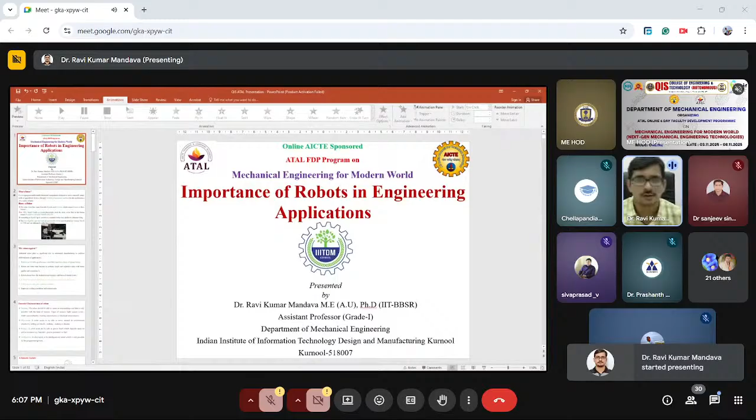Thank you, Samir sir. I think my presentation is visible to you. Yes, sir. Yes, you are audible and visible, sir.

Okay, thank you. Very good evening and warm welcome to you all participants. Myself, Dr. Ravi Kumar Mandava, Assistant Professor at IIIT Kurnool. I have done my PhD in robotics. Today, I am going to talk about the importance of robots in engineering applications.

I think you all know that nowadays many places people are using robots. It is not only for industrial applications, but they are also being used in home applications, personal applications, medical applications, agriculture applications. There are numerous applications where they are being used, and very soon we can see the complete human tasks being done by humanoid robots as well.

Today my talk will first discuss the introduction part about the robot. Then I want to show a few examples of the different types of applications where robots are used, like in industrial, agriculture, or medical applications. Before going into my talk, first I want to discuss what is a robot.

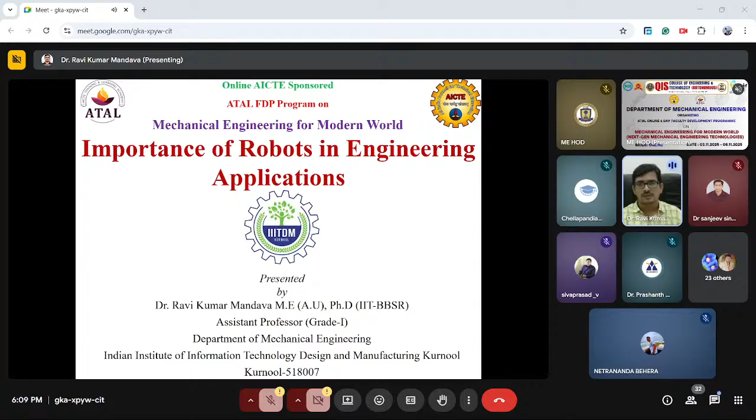I think maybe a few people may know, many may have heard about the exact meaning of the robot. Generally, when we call something a robot, it is reprogrammable. When we are going to design, purchase, or develop a robot, it should be a reprogrammable and multifunctional manipulator. When we design or develop a robot, if it can do only one particular task, sometimes we may not require that particular task anymore - we want to change to another task, meaning we want to do some other application.

When we discuss this, generally the manufacturing cost when we purchase or develop a robot should be high. That's why whenever we purchase or design a robot, it should be multifunctional - it should be able to do different types of tasks, and it should be reprogrammable. Whatever robot we design should be capable of transferring materials, parts, and tools or specialized devices through variable programmed motions for the performance of a variety of tasks.

Coming to the history of the robot, you can see when the robot concept in the world was started. The term 'robot' came from a Czech word - people initially called it 'robota'. The meaning of robota is nothing but forced or slave labor, meaning whatever task a human can do, a robot can do. The term was first introduced by Karel Čapek in 1921. He was a playwright, and he introduced it while writing a drama story.

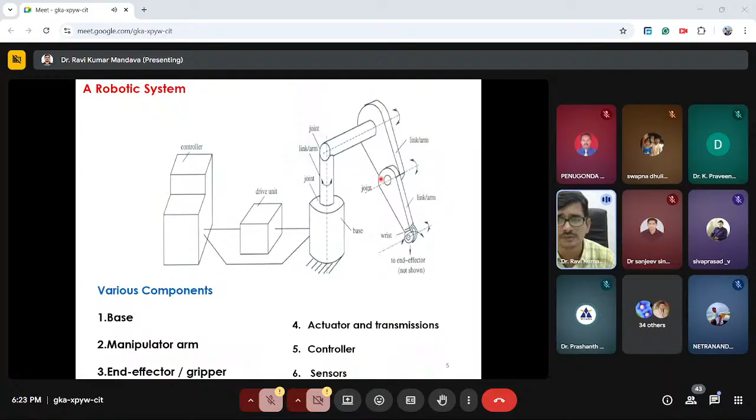When you come to industrial robots, we again categorize them into two types of manipulators. One we call the serial manipulator. Why do we call it that? Because all the links are connected serially, as you can see in the previous picture. That's why we call it a serial manipulator.

And if the manipulator is moving on a 2D plane or a 3D plane - if it is moving on the 2D plane, like there is X and Y, and it may be rotated with respect to X or Y, we call it a planar manipulator.

Or when the manipulator is moving on the 3D plane, we call it a spatial manipulator. When the manipulator can move in 2D space, the minimum degrees of freedom required is 3 degrees of freedom, or it may be 2 linear and 1 rotation.

When the manipulator is going to move in the spatial domain, the minimum degrees of freedom required is 6 degrees of freedom.

Now there is another type of manipulator that we call a parallel manipulator. In the previous picture, you can see all the links are connected in serial.

But when you come to the parallel manipulator, you can see there is an upper frame and a lower frame, which we call the upper platform and the lower base.

The links are connected - this is one link, this is another, this is the third, the fourth. In the picture you can see there are 6 links, but all 6 links are connected parallel to each other, like one link is parallel to another link.

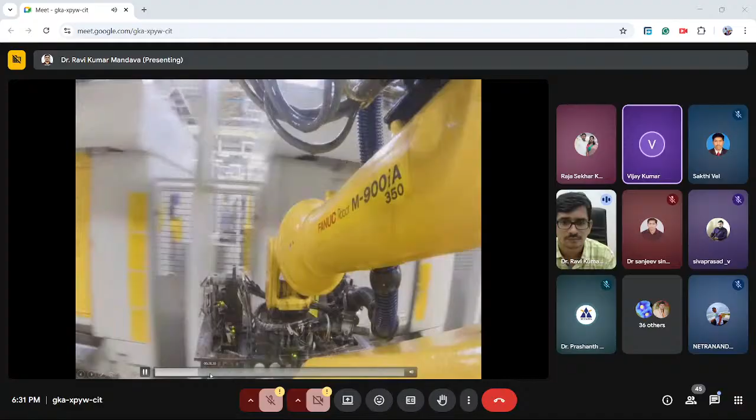Robots and factory automation solutions have been facilitating industrial production for over 60 years. You can see here how they are used in manufacturing.

While assembling applications in the manufacturing environment, the robot can do assembly work, like pick and place operations.

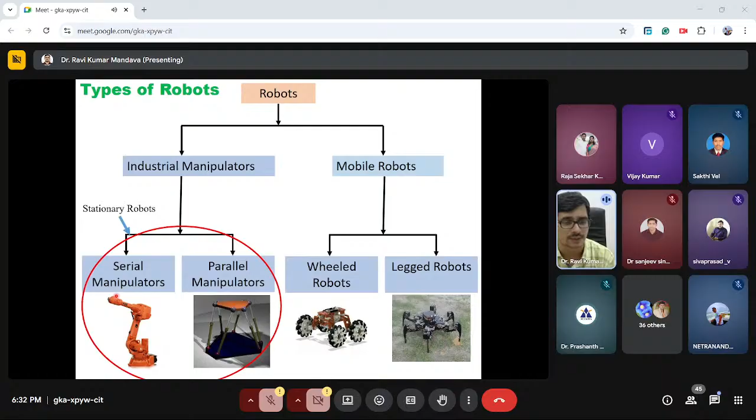When we talk about an end effector, every industrial robot requires an end effector. Only then can it be capable of performing particular tasks. End effectors are generally of two types: one is called a gripper, and the second is called tools.

Generally, end effectors are categorized into two types. One is the gripper, which is capable of grasping objects and holding them while moving from one location to another. The second is tools, which perform a particular operation. For example, you can attach a welding gun to do welding, a painting brush to do painting, or a cutter to do cutting. Depending upon the application and what type of tool you require, you can change your tool.

You can see here the varieties of grippers. When you go deeper, there are different types of grippers, like mechanical gripper, vacuum gripper, electromagnetic gripper, and adhesive gripper. There are many varieties of grippers, and it depends upon the application.

When we are going to hold glass, we use a vacuum gripper. When we are going to hold metal parts, we use an electromagnetic gripper. When we are going to hold small objects, we may use a pneumatic gripper, a mechanical gripper, or an electrical gripper, depending on the need.

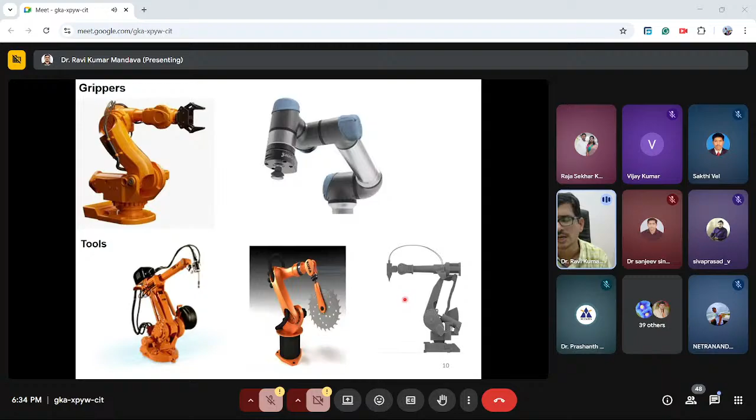When you come to tools, as you can see in this picture, for welding applications you attach a welding gun. When you need to cut something, you use a cutter. When you are doing a painting operation, you attach a spray painting gun.

Generally in industry, there are different types of applications utilizing robots. One is material handling applications, and the second is machine loading and unloading. Earlier, in industry 1.0 and 2.0, when shifting material from one location to another, only humans could do the task. But when industry 3.0 came, computers and robots were introduced, and these robots became capable of carrying things from one location to another, such as in material handling and machine loading/unloading applications.

Here, when we use machine loading, if we are going to load manufactured products into, say, a vehicle or boxes, we can use robots for loading and unloading. They are capable of loading these products.

When you come to assembly applications, as I told you earlier, if you want to do some assembly, like fixing the door of a vehicle, or fixing electronic components on a board or chip board, robots can do that too. There are other applications as well, such as inspection, welding, and spray painting applications.

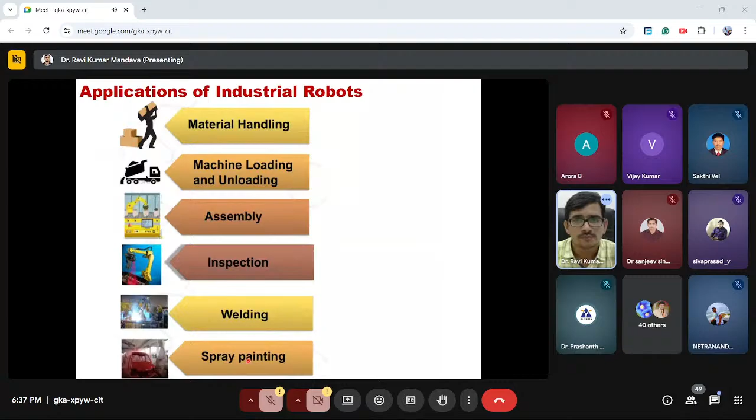Like I already told you, material handling applications, you can see transfer the material from one place to another place, and loading and unloading application. We can use the serial manipulator. Here you can see in this picture the robot in the bottom.

They have provided some wheel type of mechanism. In this case, what will happen? The robot can be capable to move throughout the entire environment of the industry, and it can place things from one location to another location. It can be capable to be moved from one location. The best example is like Amazon, the warehouse.

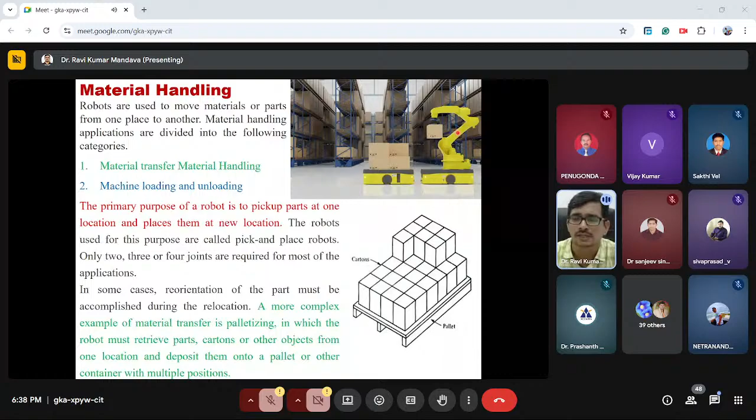In Amazon warehouse or Flipkart warehouse, there are many number of cartons that will be there, that as a human being it is very difficult to be capable to arrange all these things. That's why we are going to use these type of industrial robots. The robot can be capable to move the things from whatever boxes will be there, or it can be moved from one location to another location.

What are the benefits we can get? We can get high precision, accuracy, and safety. The main point is safety we can get, and speed when compared to the human, and reliability of the workpiece it can be generated, and flexibility. Whatever the changes we can do, why? Because the robot can do all the tasks by programming only. If you want to do something change in your task, you can just simply change your program. That type of flexibility we will get when we are going to use this robot in manufacturing applications.

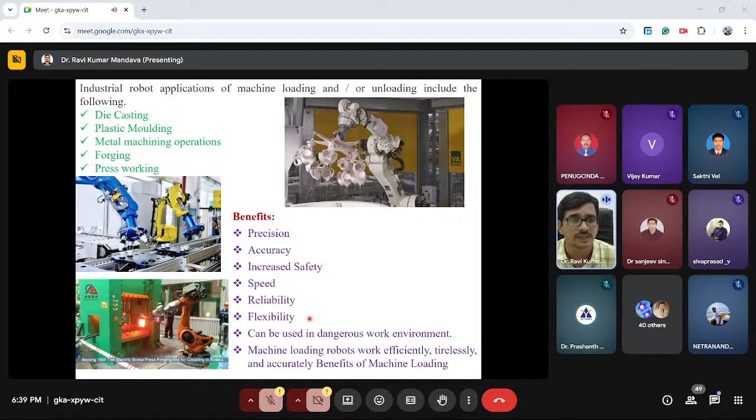And this is the inspection I already discussed. When you are going to make any manufactured product, if you want to pass it from the manufacturing industry to the outside environment, we want to check the quality, and the inspection we can do. Here we can identify by using the 3D camera, or it may be RGB camera. We can identify what defects are there, then it can be passed, or whether it will be rejected.

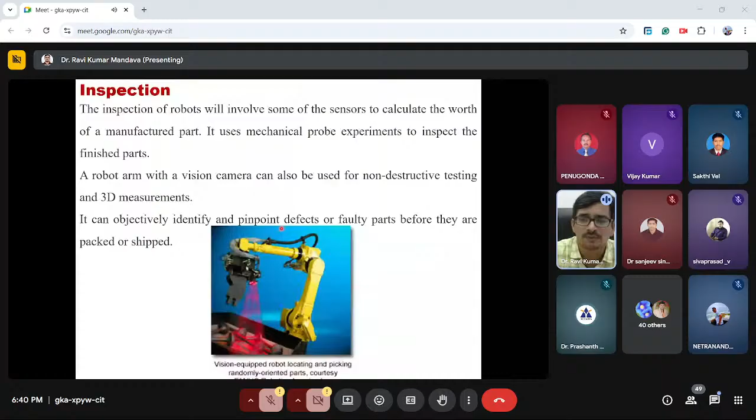And like welding applications, you have seen when you are going to compare manual welding and robotic welding. Try to observe it, how very good quality and fine the welding should be. We will get it when we are going to use manual welding, there is a lot of disturbance. Why? Because a human cannot do that much accuracy. If you have time, you can check it whenever you go to industry or your institutes. You can check the difference of welding quality between human welding and robotic welding, and see the benefit we can get.

The greater quality of the product, whatever product we make by using robotic welding, the quality will be increased and improved, with higher safety and higher productivity. We can produce many products in a single day, or even in an hour.

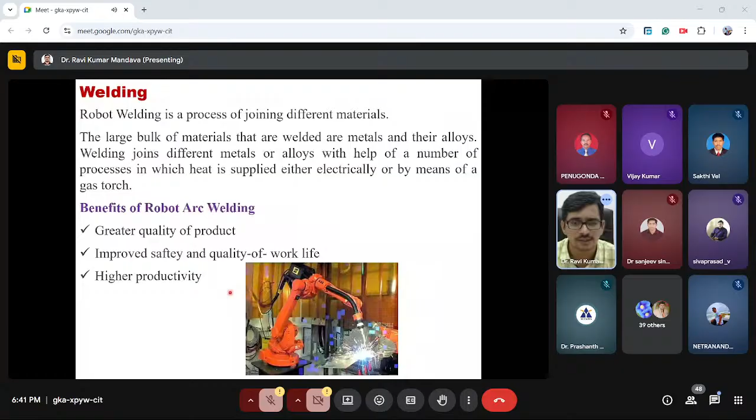Like you can see in spray painting applications. When painting a vehicle, generally the paint we use is a chemical, completely chemical, and it is harmful to human beings. That's why we don't need to introduce any human being. A robot can do the task, and it can exactly do whichever part you want, whatever type of painting, everything it can be capable of doing.

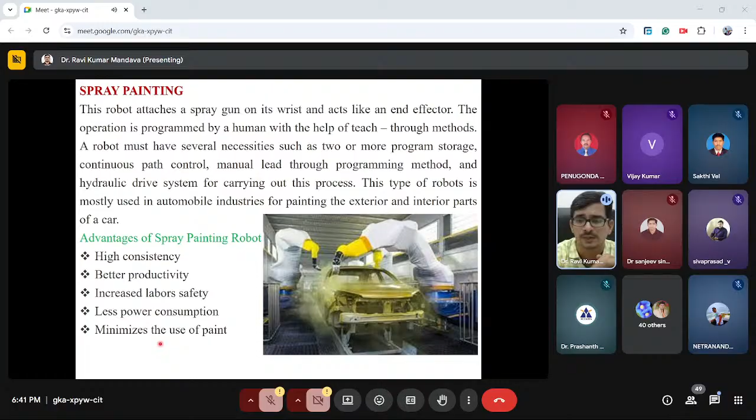See the advantage we get by using a spray painting robot: high consistency and better productivity, increased labor safety, less power consumption, and we minimize the use of paint. The paint utilization is also less, we can minimize the paint used.

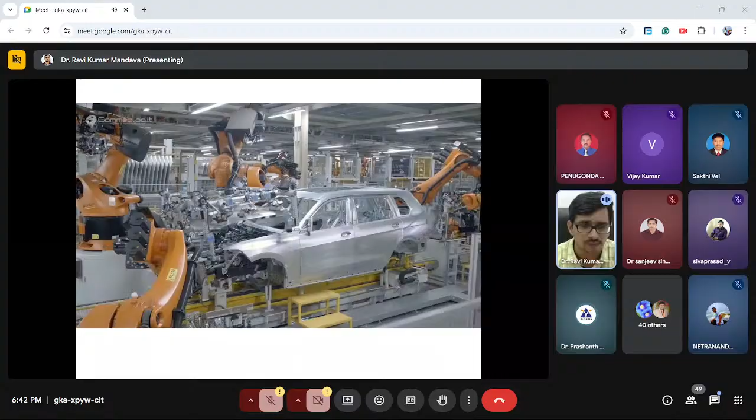You can see this video and how robots can do different types of operations, like assembly operations, like painting operations, how the robots can do it.

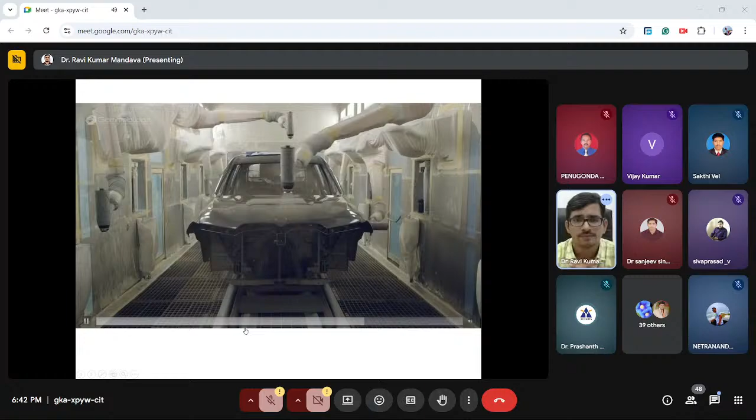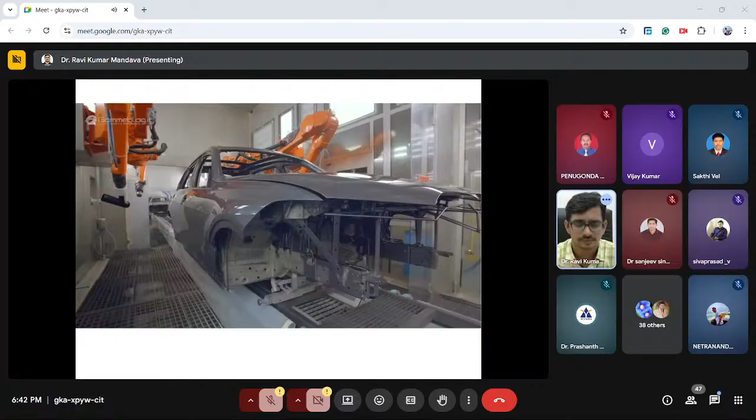When you come to what generally happens, these robots we use in industry, we call them robot cell layouts. What happens is that when we use a robotic cell, it is a complete system of the robot and controller, and there are other peripherals as well.

The robot cell has different classes. One is the robot centered work cell, the second is the inline robot work cell, and the third is the mobile work cell. What is this robot centered work cell?

Here, the robot is fixed in one place, and whatever machines are required to complete the particular task, from raw material to the complete product, those machines are placed surrounding the robot. Then the robot can control all, maybe 3 machines, or 4 or 5 machines.

Raw material comes on the conveyor belt, and the robot is capable of taking this raw material and placing it in machine 1. You can consider machine 1 as a conventional lathe machine, or it may be a CNC lathe machine. The robot takes this raw material and places it there, and the machine does the particular task.

Once the task is done by machine 1, the robot comes again and takes the part and places it on machine 2. Then once machine 2 is done, it moves to machine 3. So a single robot can control a number of machines.

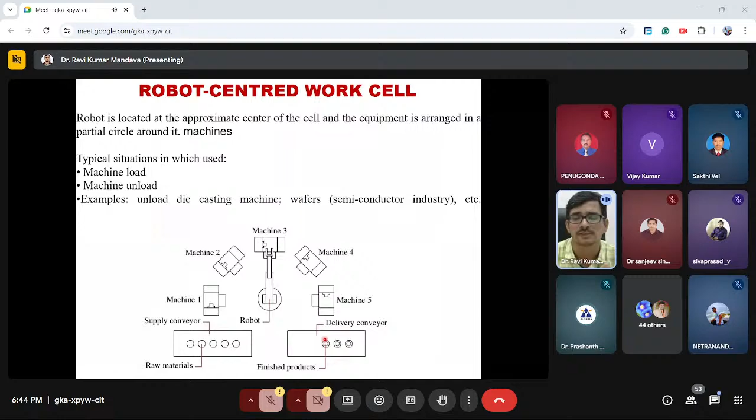We can pick and place there. Finally, once the final product is completed, the robot picks that product and places it on the conveyor belt. The final finished product then goes outside the industry.

So you can see the robots located along the conveyor belt. There is a conveyor belt, and the robots are placed along it, with the material moving on top of the conveyor belt, like you've seen in previous videos of how car manufacturing is done in industry.

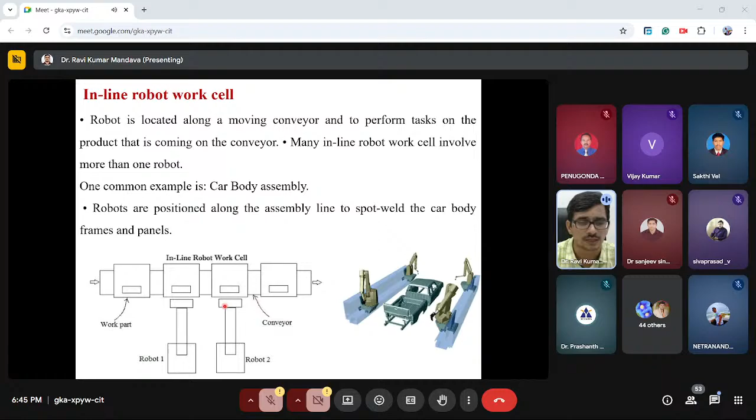See, along the conveyor belts, robots are standing stationary, and the conveyor belt is moving. Each robot, whatever time is required to do a particular task, we set in the programming, and according to the task, it will complete, and the finished product will go to the next robot. Whatever task the next robot can do, then it will go to the next position.

Like the third type, we call it a mobile work cell. In the mobile work cell, what happens is the robot is there, and along the machines, the robot moves on a railing mounting. See here what will happen.

This is the input material, and there is machine 1 and machine 2, and there is the output material. The robot is placed on the railing mounting. The robot will grasp the input material, and place it on machine 1, and machine 1 will be able to do whatever task it is capable of completing.

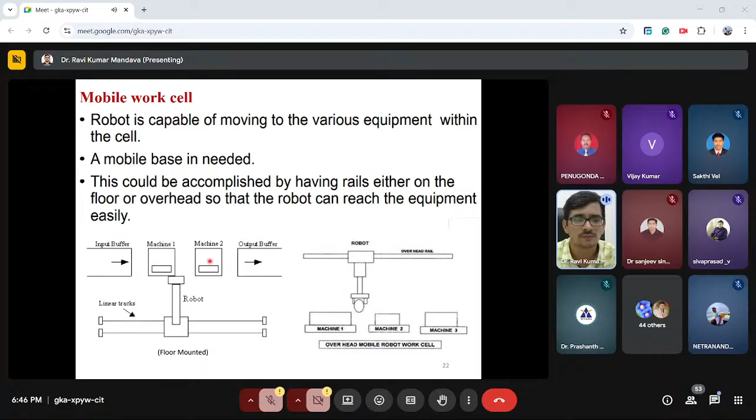Once completed, the robot can move on the railing mounting, collect the product, and place it on machine 2. Finally, the robot can collect the product from machine 2, whatever task machine 2 is capable of doing. Once finished, the robot can collect it and place it onto the conveyor belt, the output of the conveyor belt.

We can see robots used not only for welding applications, not only for assembling applications, not only for loading and unloading applications, not only for painting applications - nowadays they are using robots for other engineering applications. People are using them for 3D printing. Many of you may know about 3D printing, and you may have seen in your laboratories how 3D printing can be done.

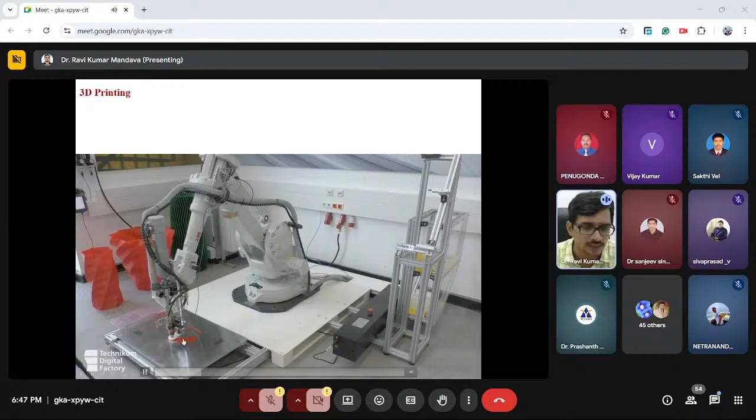Here you can see - we are going to make our own extruder at the end of the robotic arm. At the end of the robotic arm, we attach the end effector here. This robot can also do layer by layer deposition, like 3D printing, which we call additive manufacturing. That layer by layer deposition can be done using polymer material, and also by using the robot.

This is the industrial type of robot, and I have also shown a collaborative type of robotic arm. In the previous slide I showed we use polymer material, but we can also use metal. We have used wire here, which we call robotic wire arc additive manufacturing, WAAM.

We can do layer by layer deposition, and we can also do welding operations using this robot. This is the robot we have purchased at IIITDM Kurnool. One of my PhD students is working on it.

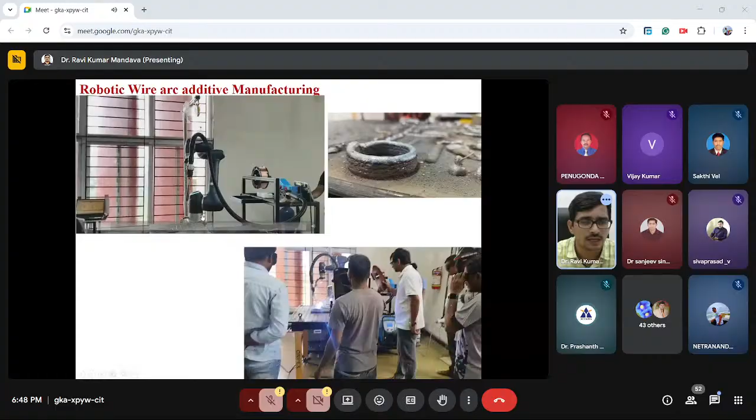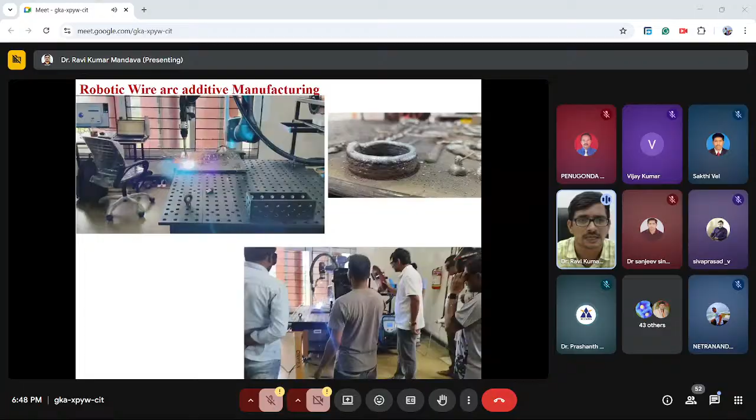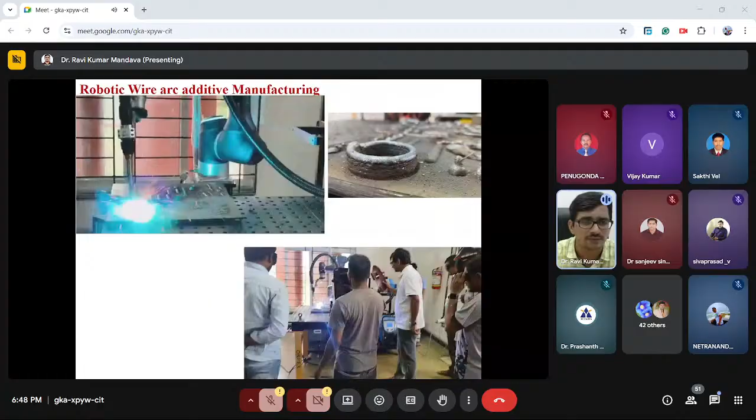The layer by layer deposition - how the robot is capable of doing it. See how people use polymer material for layer by layer deposition to make some components. Whatever components we require for our projects, we make them using polymer. In a similar way, whatever metal type components we require, we can make using this wire arc additive manufacturing. You can see this video.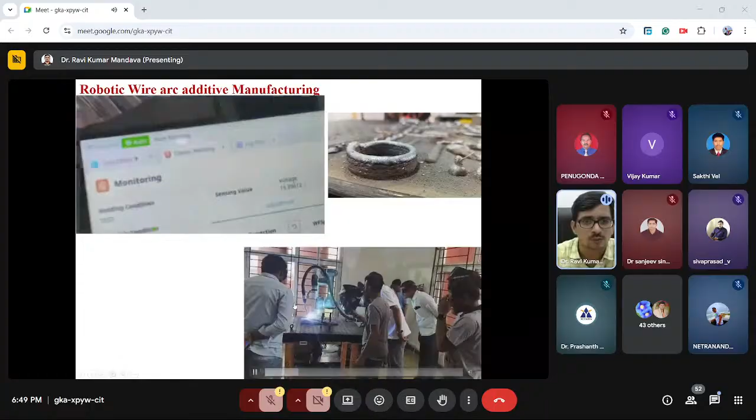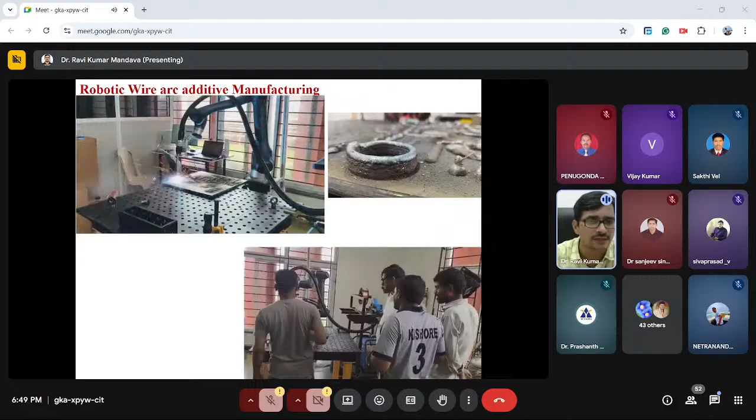In this welding control, depending upon the material, we can change the current, the voltage, and the speed of the robot - everything we can change here. And whatever torch angle we require, we can control that too.

As I said, up to now what I discussed, all these applications relate to industrial applications. Then we move to other societal applications, like inspection applications, and like we can use military applications.

There are other types of robots. One is the stationary robot, and the other you will call a mobile robot. The mobile robots have two categories: one is the wheel robot, second is the legged robot.

Wheel robots: the bottom of the robot consists of wheels, and based upon the wheels only, the robot is capable of moving from one location to another. But these robots can move only when the terrain condition is flat. When the terrain is not flat, it is very difficult to move.

But researchers have tried different types of wheel robots. The first type is the single wheel robot, or we call it a ball type robot. The problem is that with single wheel and two wheel type robots, balancing is very difficult. People are trying, by using gyro and accelerometer, to balance the robot.

There are different types of inspection applications where humans cannot go. In particular applications, we can send this robot, we can capture images, and based on the image, we can take a decision.

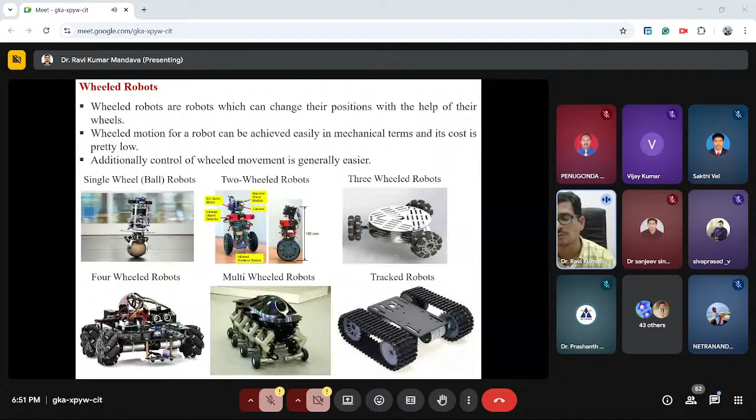There are other varieties, like the legged robot. The legged robots are mobile robots, similar to the wheel robots. Here, instead of wheels for locomotion, we are going to make legged type of locomotion.

There are varieties of legged type robots: one-legged robot, two-legged robot. The two-legged robot is called a bipedal robot or humanoid robot. There's also a three-legged robot. There is a big challenge with one-legged and two-legged robots - the 3, 4 and 6-legged robots can maintain balancing, but the two-legged robot cannot maintain balancing easily.

Take the example of a kid: when a kid is born, after 1 year he is able to stand, and after 1.5 years he is able to walk. When he starts walking, he always falls down, because his center of gravity goes outside his foot. When it goes outside the foot, he tries to fall down. In a similar way, in bipedal robot research, we try to push the center of gravity inside the foot - only then can it achieve stability.

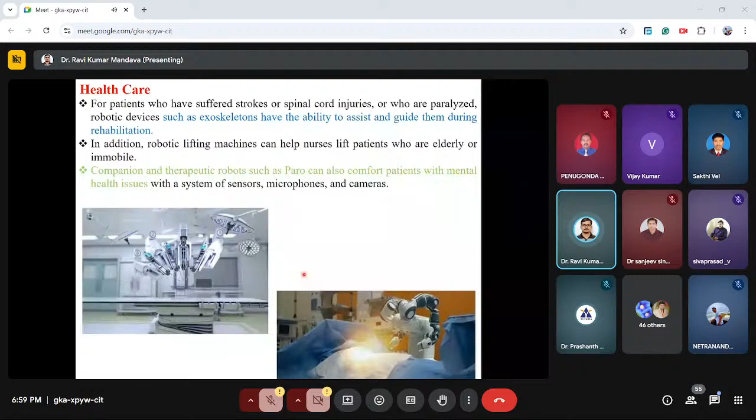There is another advantage in healthcare applications. Suppose the doctor is somewhere and the patient is here, and there is a robot here. The doctor can operate the robot from their own location and perform surgery on the patient from a different place.

Recently we can see these robots slowly being introduced into home applications, like kitchen applications, to prepare food. Depending on what dishes you require according to your menu, the robot can be capable of doing the dishes also.

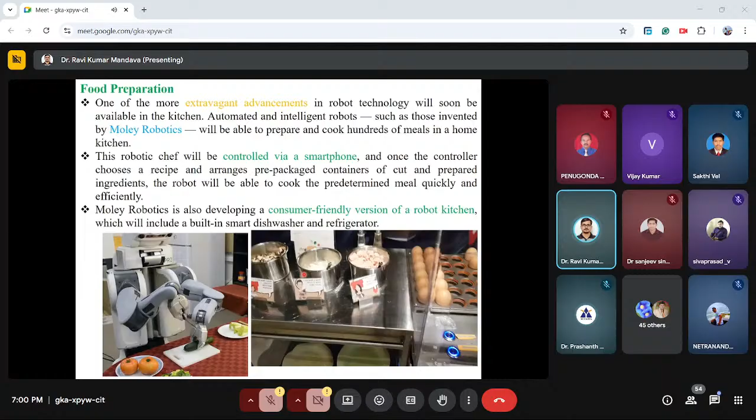You can see service robots used in banking, or in malls. These robots are easily seen in banking, where they can guide people to whatever task or person they want to meet. When you go to a big shopping mall, a robot can guide you to where you want to go.

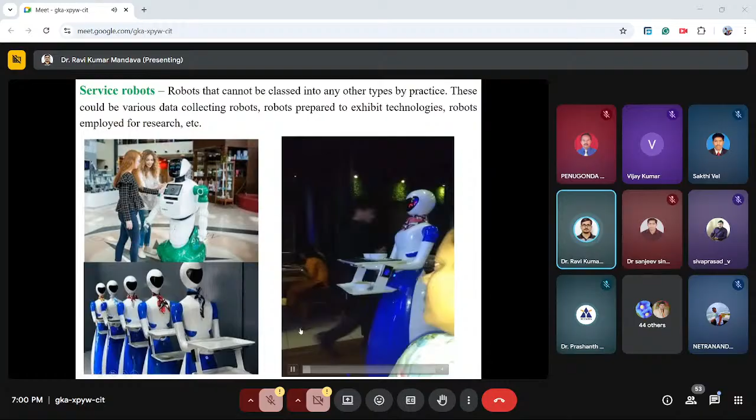You may have seen robots in hotels used for servicing, like food serving applications, carrying food from one location to another. Instead of a human being, these robots can serve food to the customers.

People have started using household applications to clean the home, like domestic cleaning robots. These robots can clean better than a human being, and you can see how the robotic vacuum cleaner is now available at lower cost, so many people are using them.

When you come to military applications, there are varieties of applications. We can use robots like robot sappers, drones, underwater robots, robot tanks, robot trucks - there are many applications people are using.

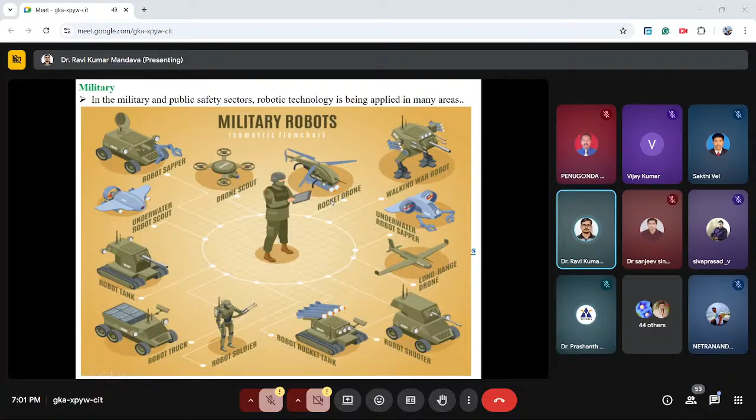When you come to space, these robots can be used in space applications. When sending any satellite, they send rovers, and these robots can go there, capture images, move on the surface, and send the images back to the ground. According to the images, we can analyze what type of environment is there, what minerals are there, and whether humans can survive or not.

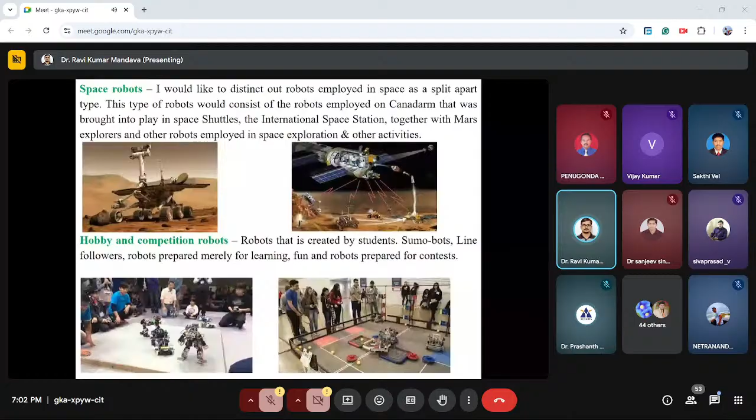We can also use robots for hobby applications like competitions, where students and kids participate. And there is another application.

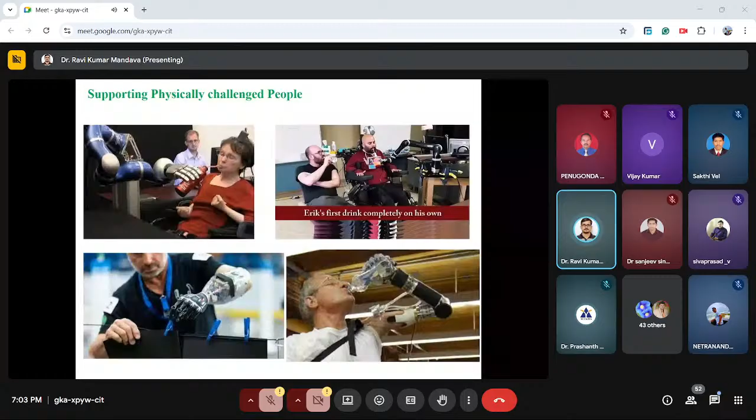In the fourth picture, you can see the person doesn't have the limb, but he's going to attach and wear that robotic limb, like an exoskeleton type. According to his muscle sensor, by using muscle movement, the person is able to use these artificial fingers to hold a bottle, drink water, take food, and do other things.

Biorobotics can think due to the presence of their own brain, which is not possible in general robotics. We are going to develop the thinking nature of this biorobotics — how the dragonfly is thinking, how the panther is thinking — so that we provide intelligence. A normal robot cannot do this.

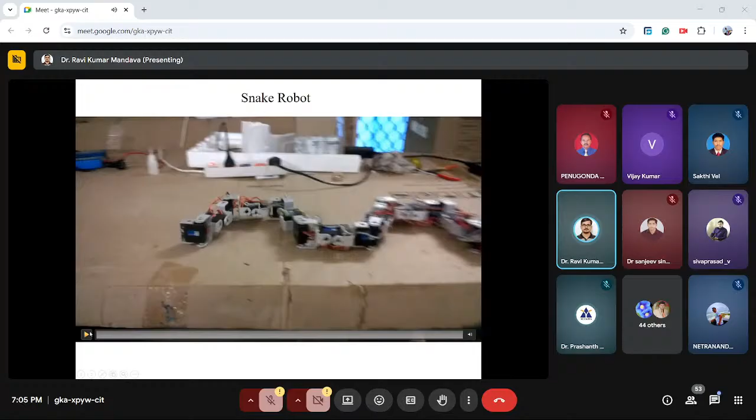You can see here, this is one type of biorobot that we call a snake robot. You can see how the robot is similar to how a snake moves, in a similar type of structure. There is another type I want to show, which we call a bird flying robot.

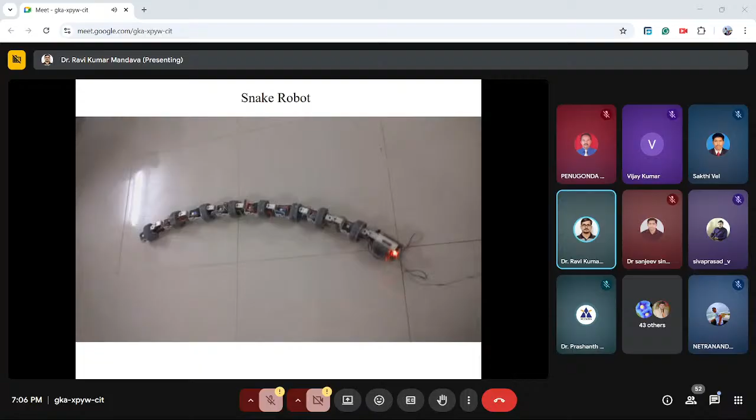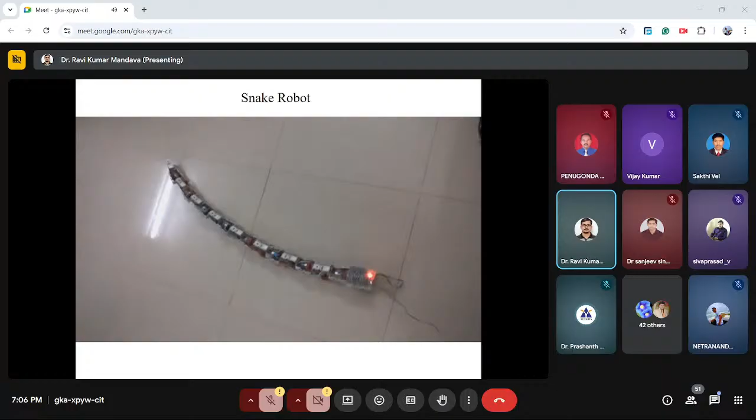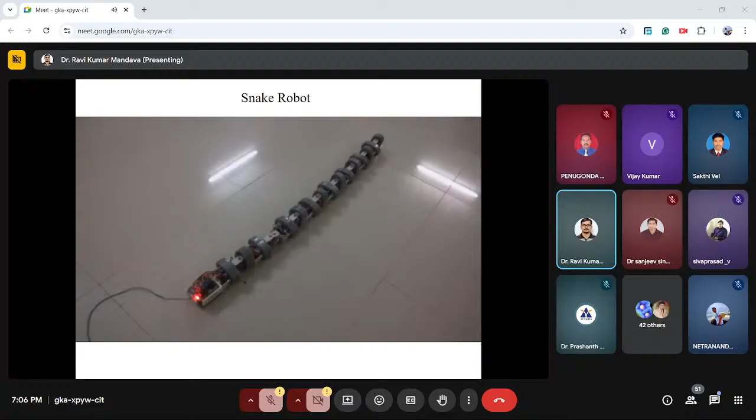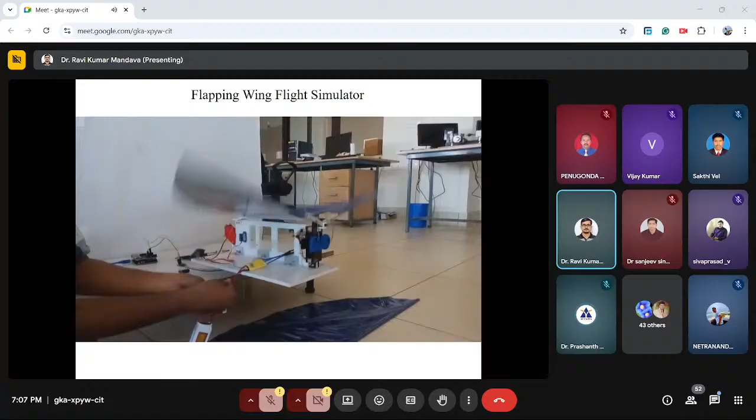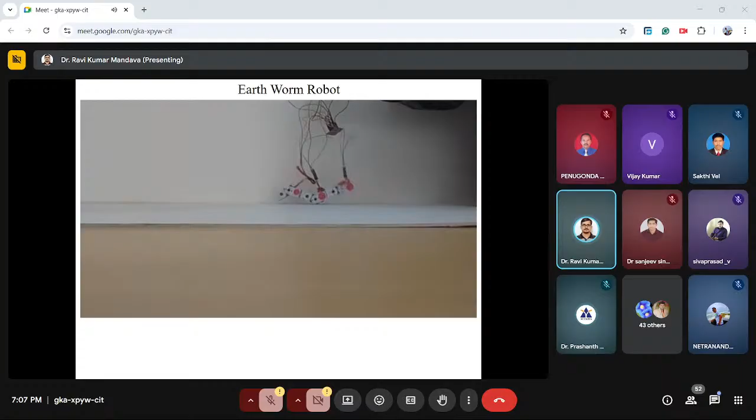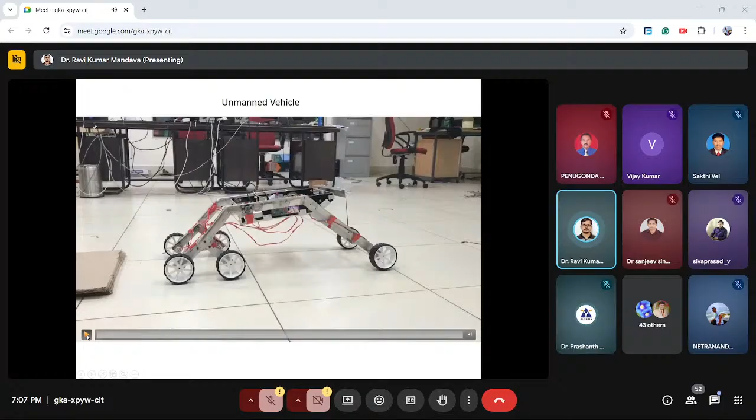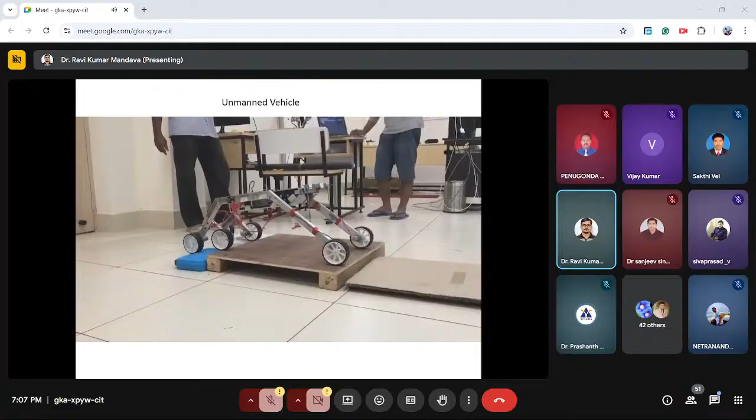This is called an unmanned vehicle. If it is an unstructured environment, it can still be capable of moving. This type of vehicle can move in unstructured environments too. You can see in the video, it's a completely unstructured environment.

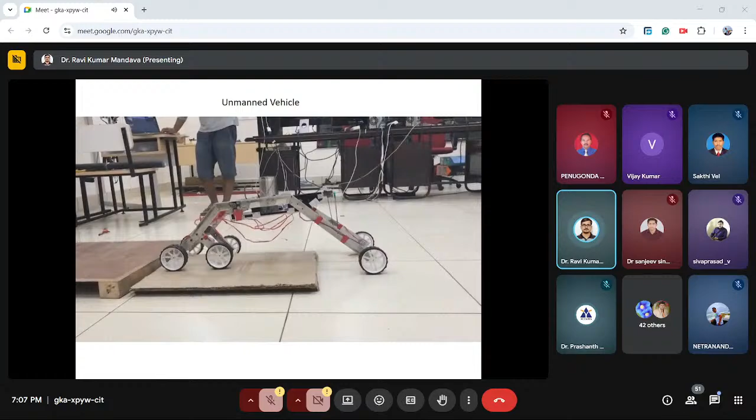This is another type, a two-wheel robot that we call a Segway robot. You can see here how the robot is balancing when it is on a sloping surface.

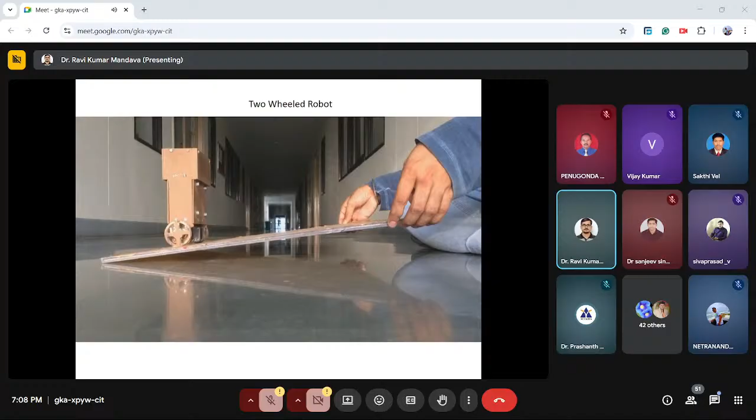After a certain slope, it may fall down. This is another mechanism we developed — a complete tree climbing mechanism. This mechanism can climb the tree until the canopy. By using some frictional forces, we developed this mechanism to climb the tree, and you can see how it moves.

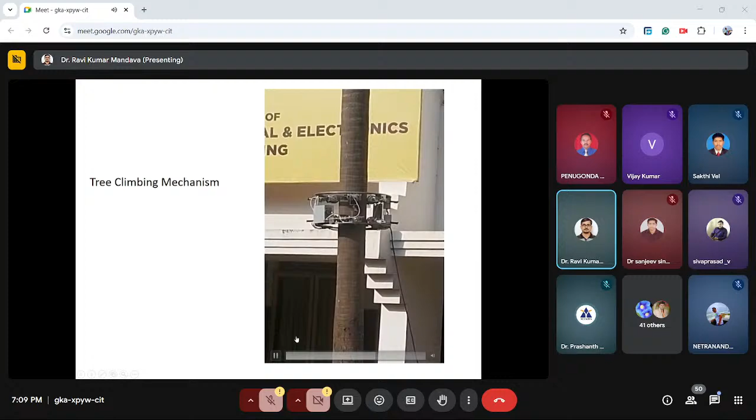This is another mechanism we developed for coconut climbing and cutting. You can see how farmers nowadays face difficulty harvesting coconuts. To cut the coconuts, we made this mechanism, which also includes a manipulator. As I said, the end effector is attached according to the type of task we want to do — here we have provided a cutter, because we want to cut the coconut.

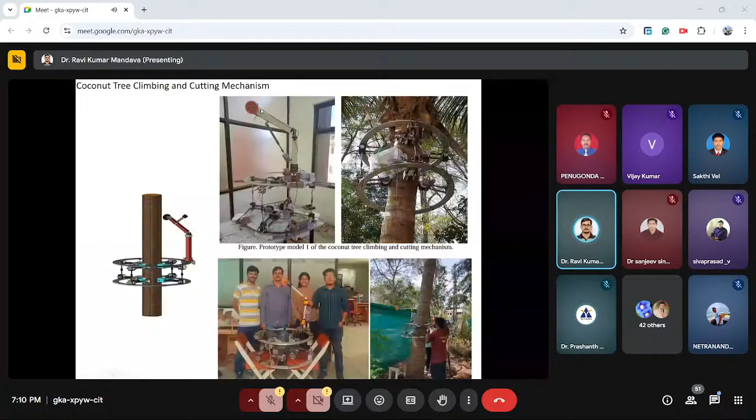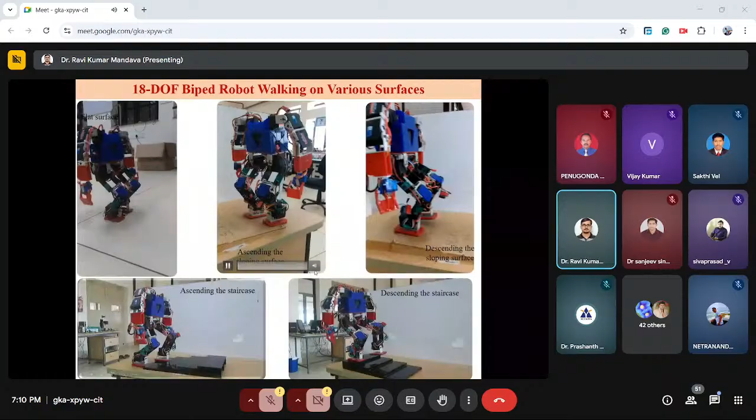The problem here is that balancing is the main issue. We have to take care of the balancing. When the robot is walking on a flat surface, it can be balanced easily. But when the robot is ascending a slope, that balancing must be taken care of. You can see here when the robot is descending the sloping surface, ascending the staircase, and descending the staircase.

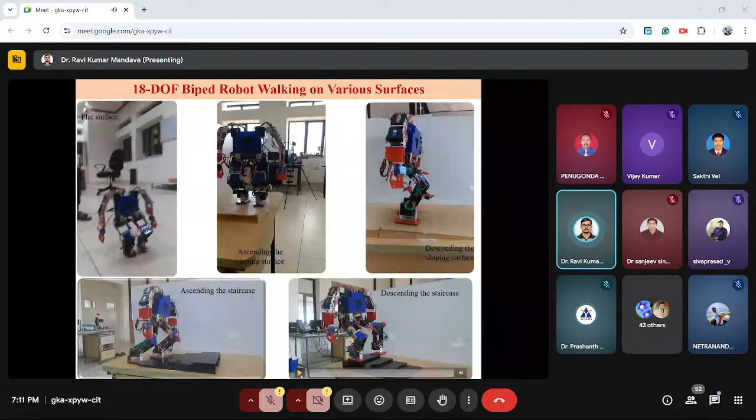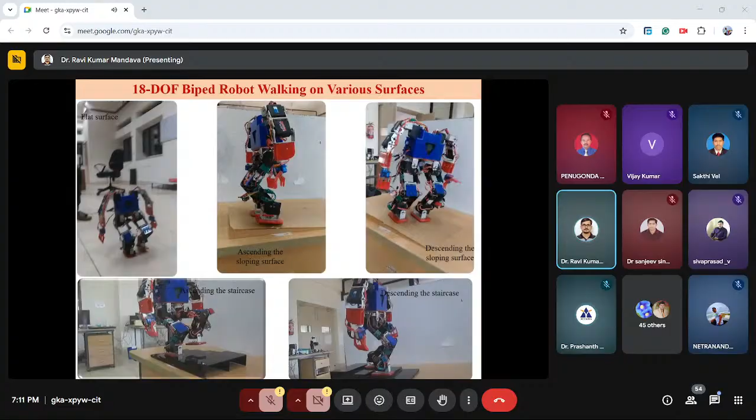Very small robots we have to take care of, similar to how, as I discussed previously, a kid learns how to fall down and we train him for balancing. In the same way, here we have to do all the training. Then your robot can be capable of balancing. Training means we have to shift the center of gravity. We push the center of gravity inside the foot. If the center of gravity is inside the foot, then your robot can be balanced.

We have done an 18 degrees of freedom bipedal robot. In this case, each leg consists of 6 degrees of freedom, and there are two legs, giving a total of 12 degrees of freedom for the legs. Each arm has 3 degrees of freedom, and total two arms give 6 degrees of freedom, making the overall total.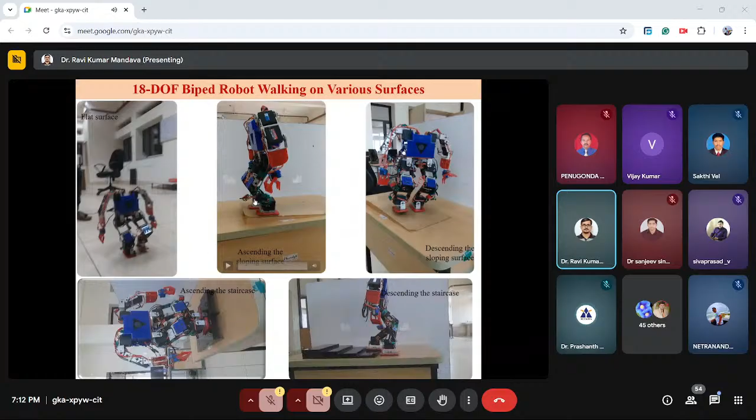In the next case, each leg again consists of 6 degrees of freedom, with 3 degrees of freedom at the hip, 1 degree of freedom at the knee joint, and 2 degrees of freedom at the ankle joint. In the next configuration, we reduced 1 degree of freedom at the hip, making it only 2 degrees of freedom, because we don't want the roll movement, only the pitch and yaw movement. That's why in this configuration we modified it and made it 16 degrees of freedom.

In robotics, when doing this type of task, kinematics is the most important part. You want to complete the kinematics, both forward kinematics and inverse kinematics. For forward kinematics, first you determine the DH parameters, then insert them into the homogeneous transformation matrix. Once done, you get the final position and orientation matrix.

Then you need to do the inverse kinematics operation, because you need to calculate the joint angles. When the robot is moving, you need to calculate what the next joint angle should be. For that purpose, you do the inverse kinematics. Similarly, you need to do the dynamics also, because we need to estimate the torque required for each joint of the robot.

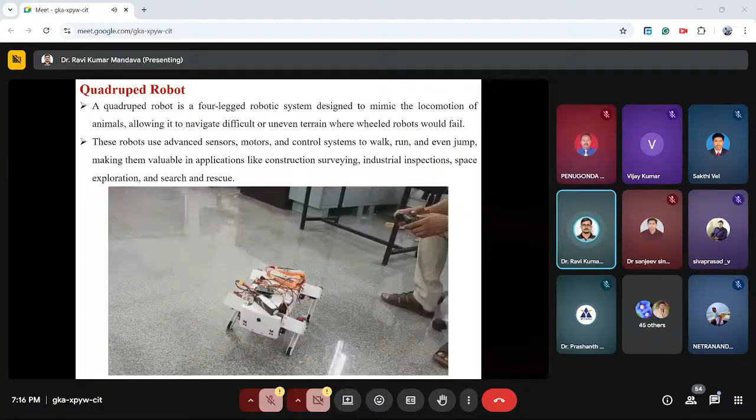We can use this type of robot in many applications, like inspection applications and surveying applications, among different types of applications. This robot is able to walk and run, and we want it to jump, so it can go and identify the environment.

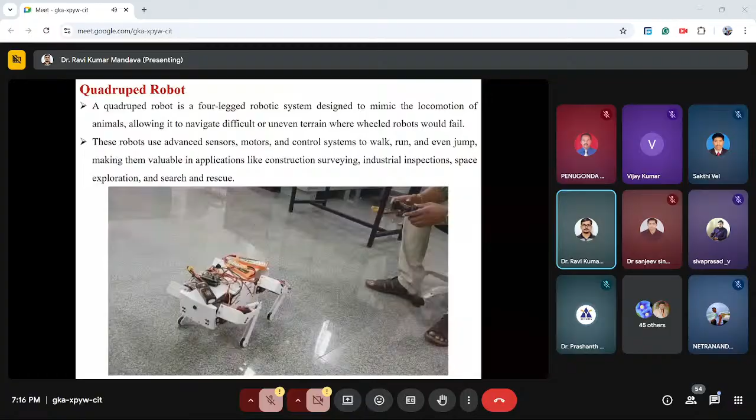We have 90 seats, and one MTech program in Robotics and Automation, and one more MTech program we started, that is Smart Manufacturing. We also offer PhD in the mechanical field, whether design, thermal, manufacturing, or robotics. In Industrial Engineering we have started, and we also offer internship programs in offline and online mode during winter and summer vacation.